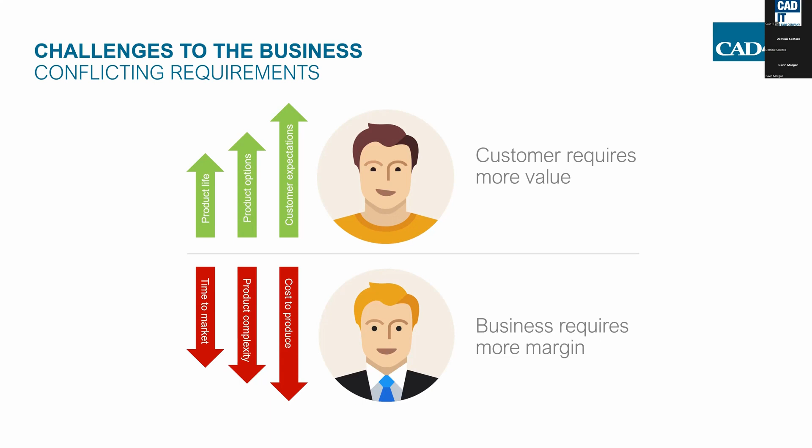And then on the internal business side of things, from a high level, we need time to decrease, time to market to decrease, and complexity is increasing, and of course cost, as these other factors increase, cost is generally going to increase as well. So trying to keep production costs as low as possible. This kind of conflicting balance between more margin as well as more value creates a real challenge.

So specifically, these demands are really increasing the need for technical documentation. This rising complexity in terms of how we're viewing technical documentation includes different formats, different languages, different styles of media, of course mobile, video, as Gavin mentioned, VR. There's a lot of new mediums to view the documentation.

To go into some more detail, increasing variance means having more types of the same product, different product changes, so we're having shorter product cycles. Think between revision A, revision B, or maybe more realistically, 1.01, 1.02. They're throwing that extra zero in there because they know there's going to be so many changes and updates, which is a great thing for the product, but it needs to be managed correctly with the proper technical documentation.

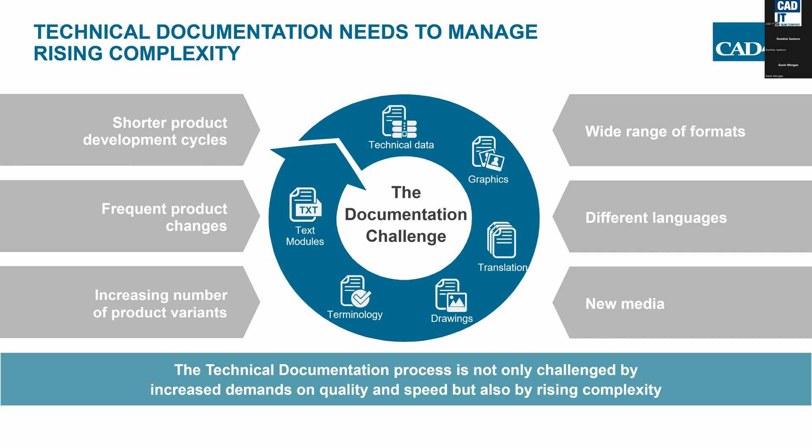So this is the current kind of challenge that's ongoing, and we like to say that the rising complexity needs to be met in time, before the product outlives the technical documentation.

So looking at current technical documentation processes, hopefully manufacturers already have a plan and are doing technical documentation to some degree. This might include more of a standard text editor, or maybe Illustrator in combination with the text editor, so more of a standalone process, not connected to any of the actual data. So you have a manual process between researching, authoring, reviewing, translating, and then publishing the data.

But looking at the process, we really wonder if it's efficient enough, if it's best in class. We're going to go through in the next few slides and the demo our solution, which is reusing the data, building a process that's more efficient and robust enough to handle changes. So you're seeing the colored charts with content management as well as reuse of the data, bringing the time for research, authoring, reviewing, translating, and publishing down, bringing the effort and time down to complete those tasks, as well as overall cost, given less manpower and less time spent on the projects.

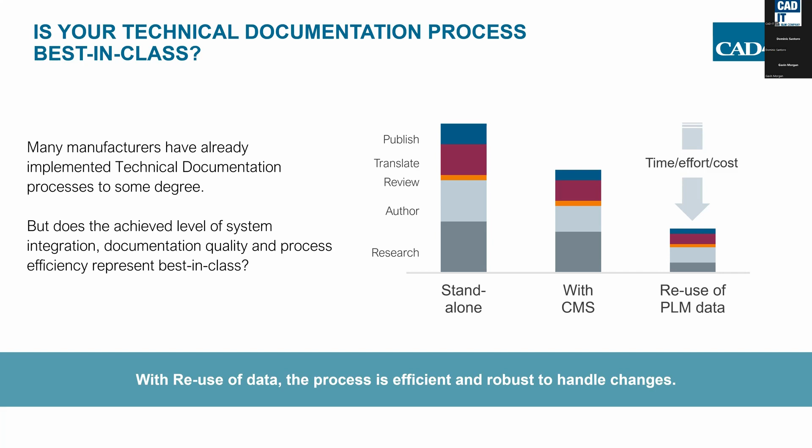So this is a more detailed view of common limitations between a disconnected technical documentation system. Looking on the left, we have the engineering data with some modules, components, CAD data, and other property data. On the right, we have our technical documentation, showing all the elements that make up the engineering and the documentation.

But they're disconnected, so you're having to frequently rewrite information. You're not able to access the engineering data directly from the technical documentation—it's just a snapshot, so there's no visibility into live changes. It could be very out of date. As changes are made in engineering, there's manual reentry of data on the technical documentation side, so all the procedures, illustrations, and bill of materials are disconnected from the engineering data.

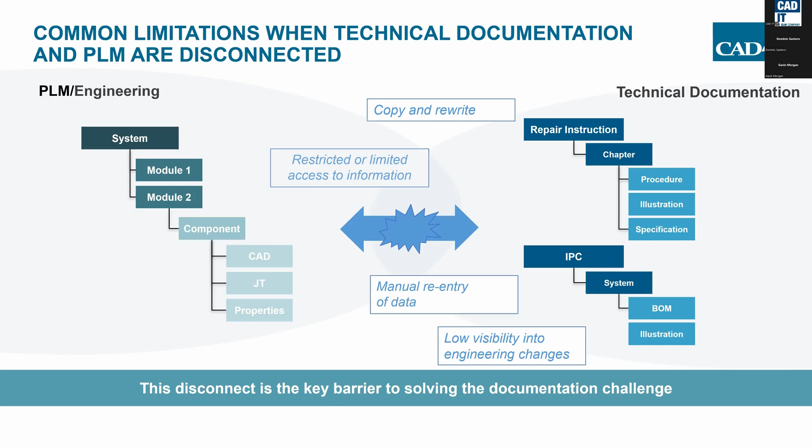To solve this and improve the technical documentation flow, we have a solution that reuses this component and module data from the engineering structure, bringing that data in a unique way into the TechPub space so you're allowed to reuse it. We're reusing the direct CAD data, which increases precision and synchronizes the entire process, going from the data to our specific technical publications.

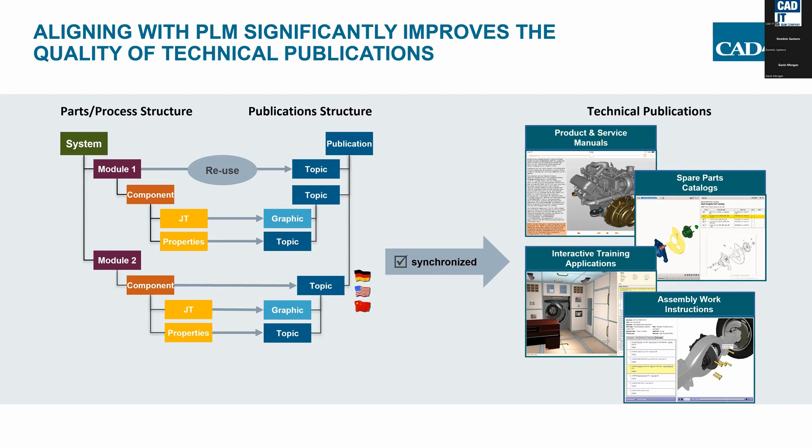Diving into some of the areas of TechPubs we're going to cover: part catalogs, maintenance manuals, training manuals, and then other solutions that build off of these tools, like work instructions, different types of manuals, as well as training applications.

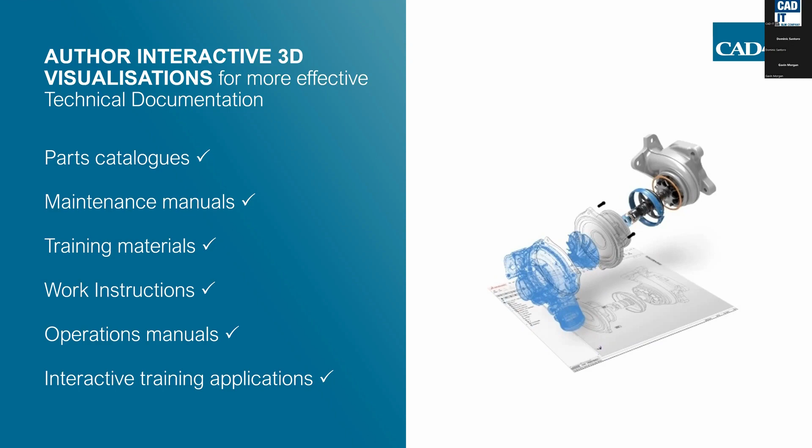So we're looking at our Rapid Author tool, which can be broken down into several subtools. This entire suite of technical publications, Rapid Author, can be broken down into—which we'll cover first—Rapid Catalog. Each tool is very similar in background and intuitive to use, but it's focused on what the output is going to be.

Working with Rapid Catalog, the goal is to create interactive illustrated parts catalogs. We have the ability to generate not only 2D images with parts lists, but also 3D navigation with context and parts lists. You can also add existing real-world images from the actual component being serviced, or something that might look very different in reality, like being covered in grease, something that's going to look different than the 3D model.

You could include real images built into the illustrations, and again, we're using the CAD data and the BOM data from engineering. This reduces errors and lowers the cost to create the catalog, as we're reusing as much data as possible, and it increases aftermarket revenue. We have precise data—bringing in the descriptions, part numbers, and quantities—everything correct and precise from the model.

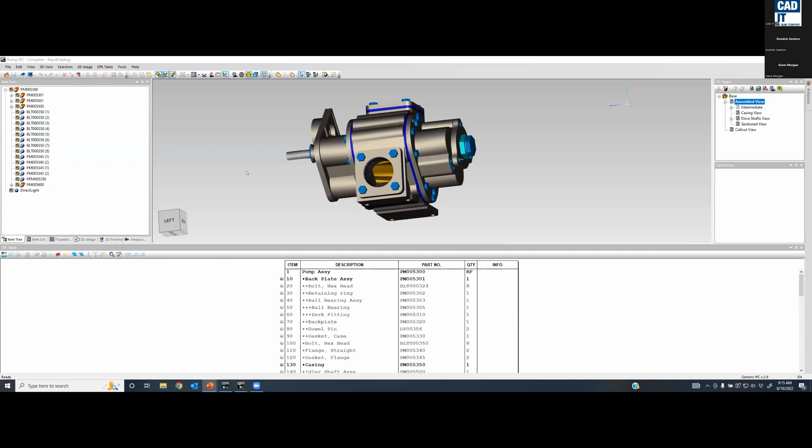We don't have too much time, so I'm going to jump into the Rapid Catalog software tool to show how easy and interactive the parts catalogs are to make. I'll spend a few minutes demonstrating the capability of Rapid Catalog. What you're seeing is a small assembly that was brought into the solution.

As this CAD information is brought into Rapid Catalog or any of the Rapid Author tools, the data is lightened and secured, so it's in a generic format, meaning you don't have to worry about the actual CAD data being measured or extracted in the publications. This adds a level of security, but also a level of quickness to the process.

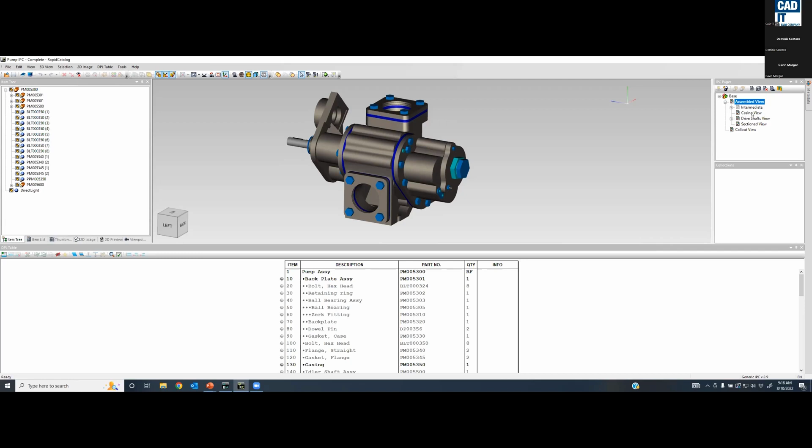I talked about the data getting lightened—you can see as I toggle through some of the pages for the catalog, it's very quick. You'll see with the movement and motion that I do, that even the largest of assemblies is a very, very lightened version of the CAD data.

So jumping right into a preview, we're going to cover what an output would look like, and then we'll show just quickly a simple change in how we would get there. But this is going to look a little bit different from the conventional catalog.

Of course, you can export this format in a standard PDF, which would look very conventional with all of your wireframe and annotated images side by side, your parts catalogs. But what I'm showing right now is the HTML output. We have various outputs that we can do, and this one is really focused on interaction and efficiency.

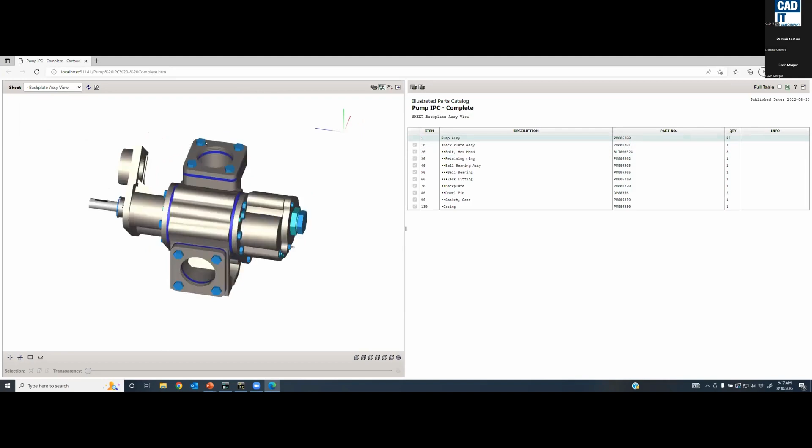Looking at the top level, we have our sub-assemblies broken up into the actual catalog. As I change the sheet, you'll see not only the visual change with a specific view being demonstrated, but also the catalog adjusts to show what is in that view.

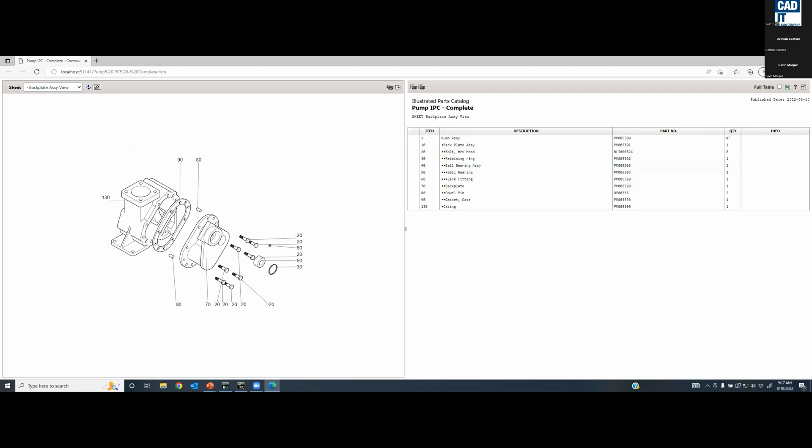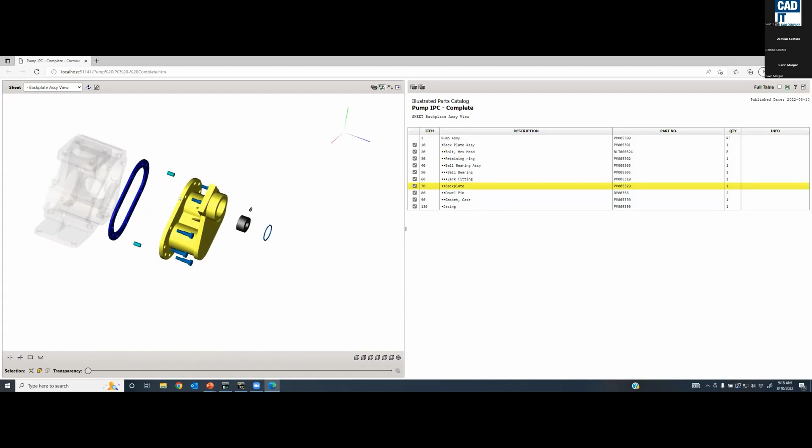From here on any page, you can toggle to that 2D view. So we still at the core have the 2D image illustration with the parts catalog, kind of a snapshot, but also we have that interactive ability to select on components and highlight them synonymously between the parts catalog and the visual sheet, as well as being able to make things transparent, hide some of the components, really manipulate the model a little bit to have a better understanding.

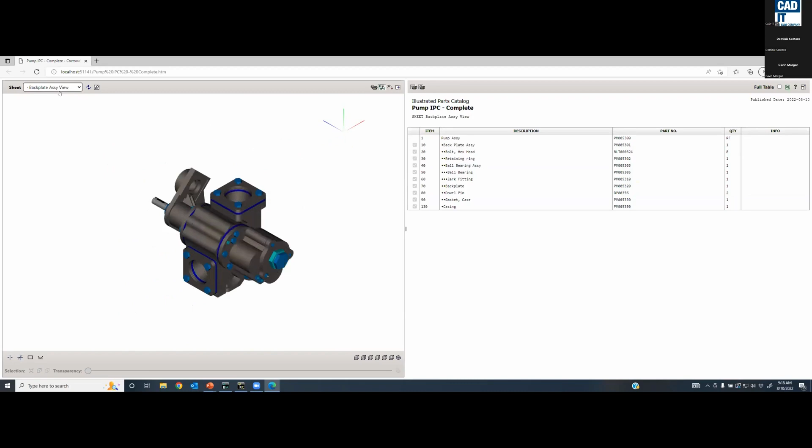As we dive deeper into different sheets, you'll see that the perspective is maintained. It's not just snapping from one page to another. You're seeing a good transition from one view to the next, giving you really good context. I'll jump back and forth really quick again to show that context of what you're looking at next. This is very different from flipping a page and having a completely different view to your component.

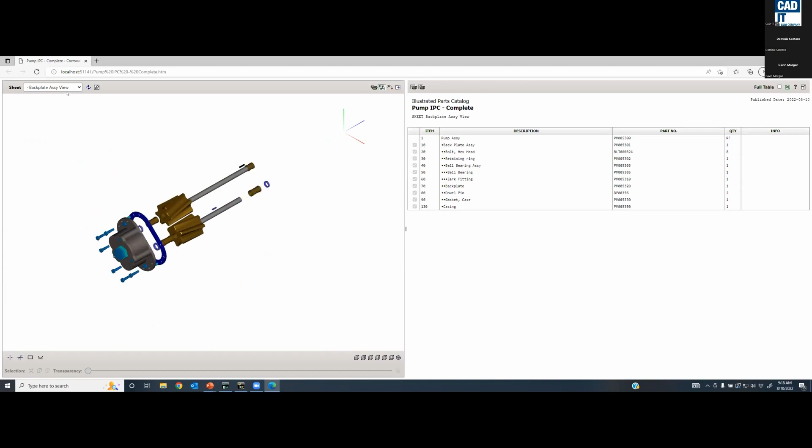As we dive deeper, you'll see each step of the way it has that context of where it is. So specifically this view, jumping back to that first view we saw, you're seeing a very quick adjustment.

And then lastly, we have the ability to manipulate the table, checking on or off components, and then the ability to see the full table if we wanted to. But just given the sake of time, really quick, just to show the lightweight and efficiency of the tool, going through and creating a new sheet is extremely fast.

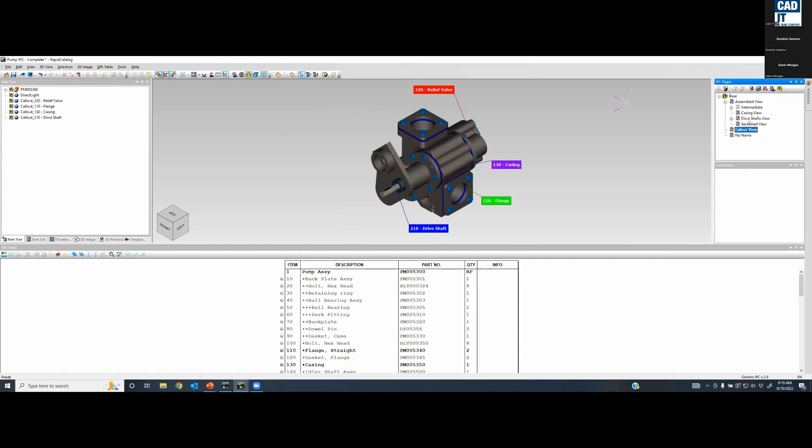So we can create a new sheet here. We can select an existing view and duplicate that view, or you can start from the top level. So I'll duplicate the top level. Go ahead and rename this. We can rename this demo just to keep track of it. And I'll go into this view.

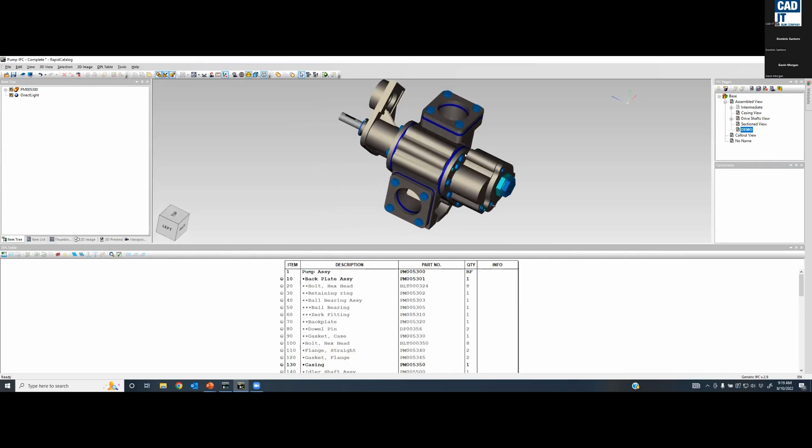We can set our viewpoint to a specific angle. So I'll set this viewpoint to more of a left focused view. I'll actually remove some of the components, and we can then see in real time the 2D preview of the wireframe output.

And from here, we can toggle on our callouts. We can maybe edit the location of those callouts, make some adjustments to the coloring, the shading, and then we can go ahead and save this page independently, as well as the image that you saw.

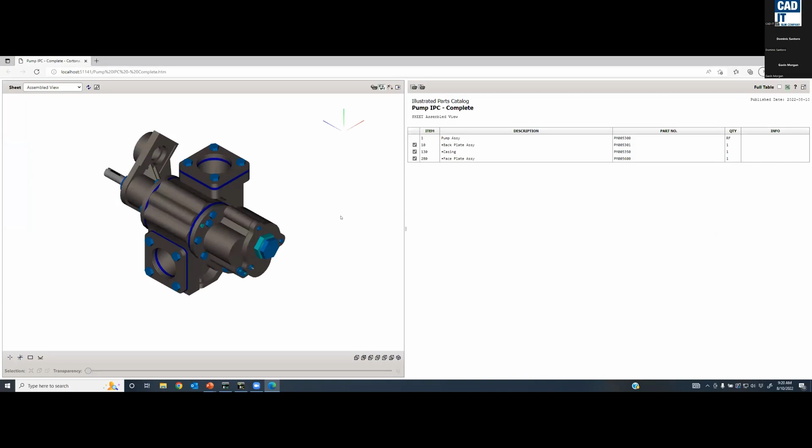And then I can reload the output and just show reusing the large BOM, trimming it down to only what was needed for that page, adding just a few pieces of illustration, and then having that view start from the left, kind of a face focused view, but also having the ability to pan and rotate to investigate the component, as well as again having that standard connection between the two. So it's a really easy process.

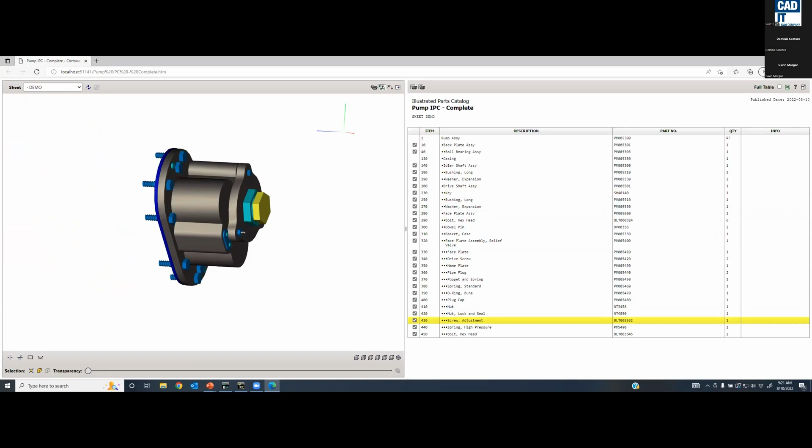Then you have the flexibility from here to choose if you want to go deeper into components and dive deeper into pages, or have more of a traditional top level view with views stemming down from the main page. So you can have the flexibility to go through, which is a little bit different than conventional authoring, where you're just covering every view specifically. This one you can focus on diving deeper into certain aspects of the component and then pulling back to the top level and diving deeper into other areas of the component.

And then lastly, I just want to mention the flexibility you have with adding rows or columns. If for some reason you don't have the actual part list, if you want to add a new line item, you can very easily do that, and create your own item, as well as associate it to a specific part number.

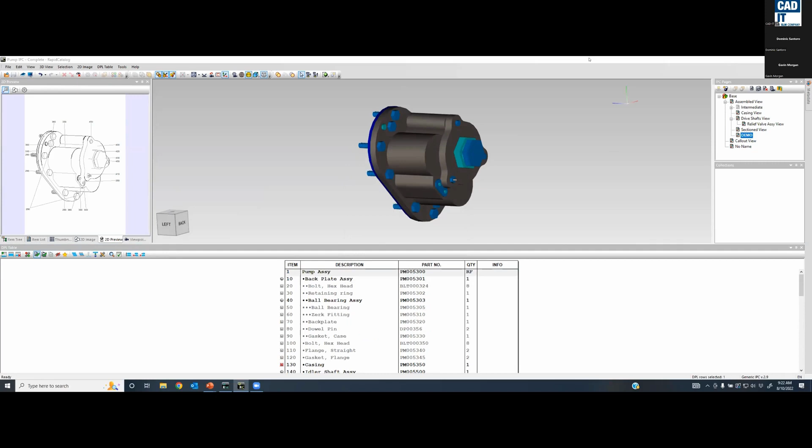So that's just a very quick introduction to Rapid Catalog. Next, we're going to talk about Rapid Manual.

Very similar background, same process of bringing in the CAD data. The goal of Rapid Manual is creating technical manuals, operating procedures, and work instructions. Rapid Manual will also serve as the foundation for some augmented reality outputs, as well as some training platforms down the road. What Rapid Manual does is create animated outputs.

It creates a 3D storyline that goes through and creates that interactive storyline to show the manual. It concurrently builds the two-dimensional text manual side by side and associates it with the 3D manual. So essentially you'll have interactive steps where you can click on the step and have an illustration, a quick demonstration of what that step is doing in real time.

The benefits of Rapid Manual: reusing the CAD data and bringing this specific information in is going to cut costs massively. You can also start this process, as it's typically a large bottleneck with technical publications, concurrently with your engineering. So if you're working on it, you're able to start the storyline and then have the information updated into the storyline. This is going to speed the time to market.

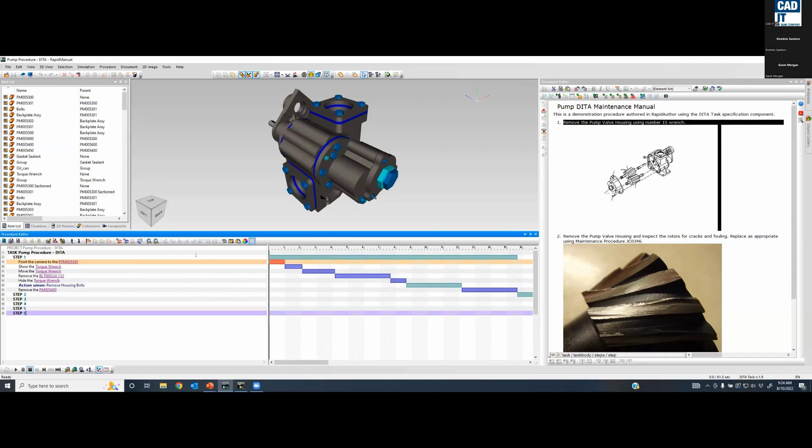All right, so as I mentioned, a very similar interface, but a different goal. So here we have our procedure, start to finish, doing a simple removal of some of the components on this assembly. I'll go and play that output first, similar to how I showed the catalog output first.

What you'll see is a storyline, a 3D storyline on the right, with full control over which components are being removed, which tools are being used to remove the components, and the viewpoints from which you're viewing the component. This is all flexible, what you're seeing on the right.

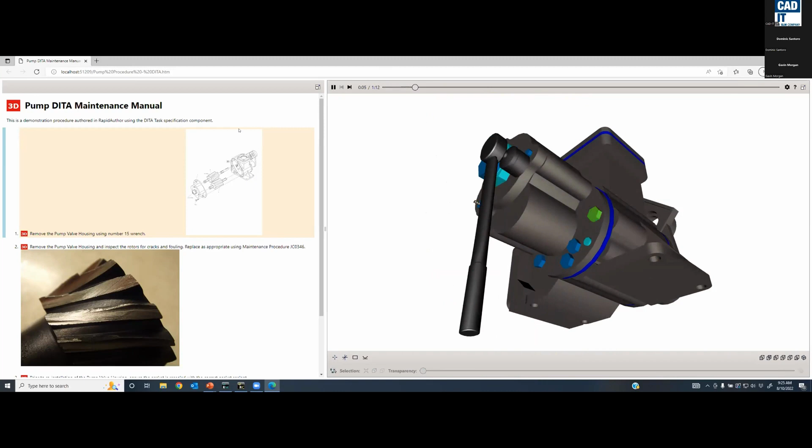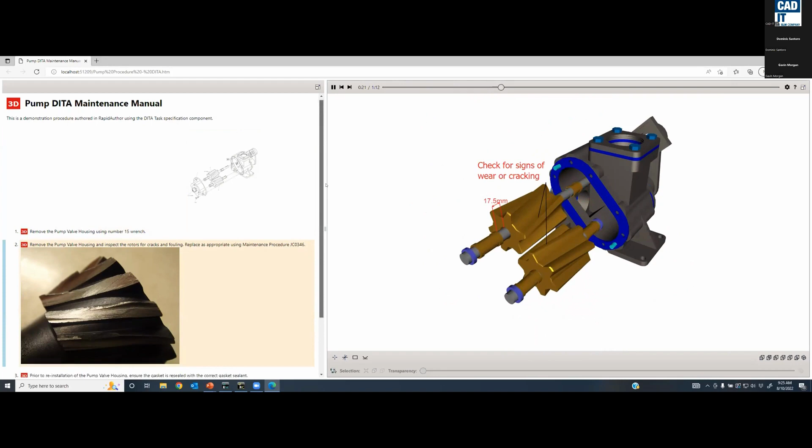And then on the left is the manual, the actual 2D manual with some real world images, as well as the steps being connected to the visual steps on the right. The information on the left would contain all the information about specific values in terms of bolt tightening.

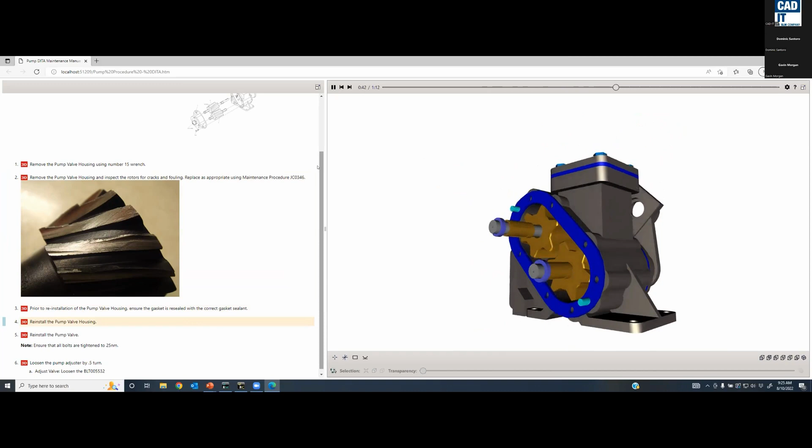Not to say you can't include that information in the visual as well, as you're seeing some instruction in the illustration, but also making sure that information is on the manual to meet all the technical requirements, as well as just the success of having a proper maintenance procedure. So we're seeing just a few more seconds left on this clip.

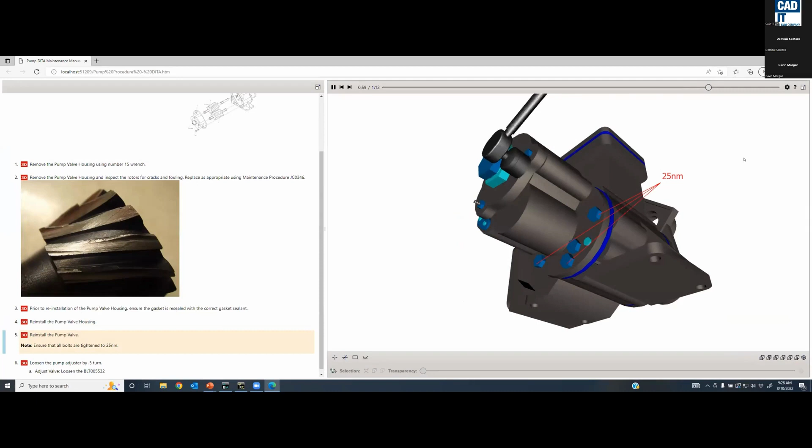Again, you're seeing each of the steps go through, they're connected, but as you build them, here we have a hard stop, making sure the bolts are tightened to a specific value. Not only are they called out in the illustration, but they're also called out in the 2D manual.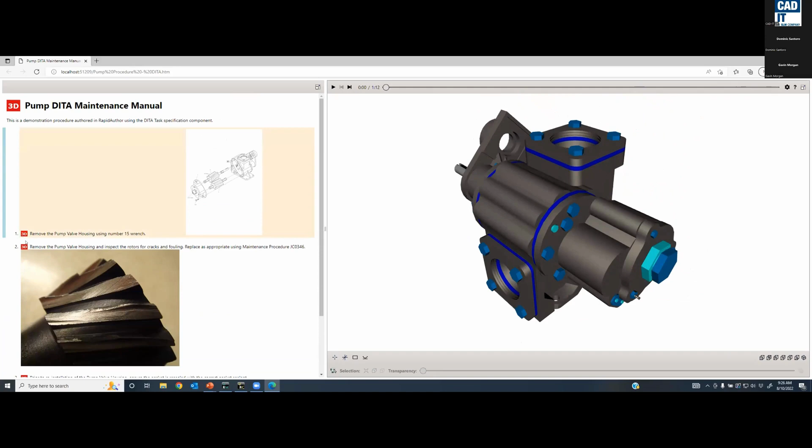And then we're just seeing a few other changes, and I could scroll up and down the procedure and view the entire procedure on the left. As I click on a specific component or a specific piece of the procedure, it will jump to that part. Right now it looks like a streamlined video, but as I said, it is essentially broken up chunks all put together.

From the background, just to give you a quick look at all the types of actions you'd be able to complete, we have a variety of different actions that can be combined: inspections, installations, removals, opening and closing. It's well prepared for all the types of mechanical movement, as well as prepared with the object gallery if you want to bring in specific types of components or your own tools. If you want to bring in your own CAD geometry for tools as well, you can do that too.

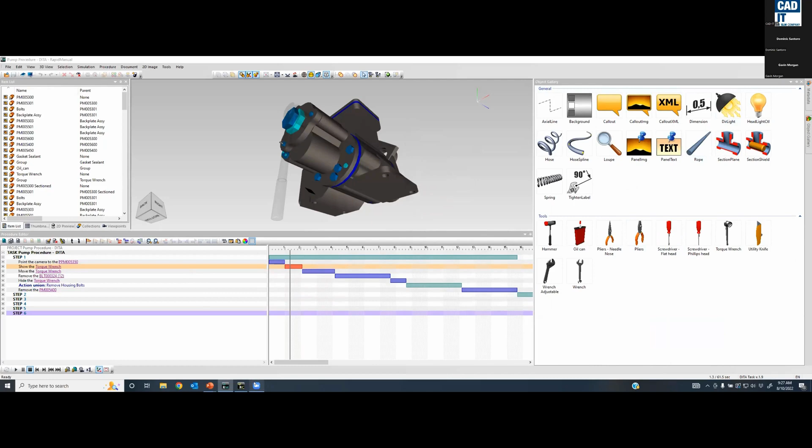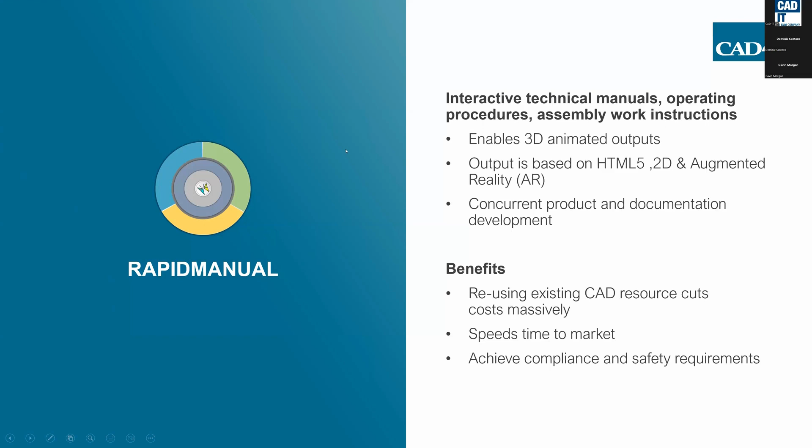So, a very quick introduction to Rapid Manual. And then lastly, I just wanted to touch very quickly on the goals and values of Rapid Learning. This is going to build off of Rapid Manual.

So you have that interactive 3D learning environment. You'll be able to put hard stops with questions and gather information based on who's taking the test. You can have those compliances, the LMS and SCORM compliances, so that you can record who is going through the manuals and learning experiences.

Make sure you can add audio and existing documentation, so you can take Rapid Manual's output and bring it into Rapid Learning, adding a few more settings and values to get your learning environment.

This is going to greatly accelerate training timelines because you're reusing the data you already created for Rapid Manual. You're going to cut costs because you're reusing not only the CAD data but also the information from Rapid Manual, and you're going to improve safety, retention, and job performance.

There are a lot of values in terms of getting someone who has not seen the component or assembly yet up to speed as quickly as possible. Make sure they know all the hazards and areas of danger, so that when they are in front of the actual component or assembly, they're much more familiar with it.

So just quickly in summary, Rapid Author—we went through some of the suite tools, but it's a single tool that covers all of the authoring needs. No CAD experience is required, although that's where the information comes from. Working in the authoring tool is very intuitive.